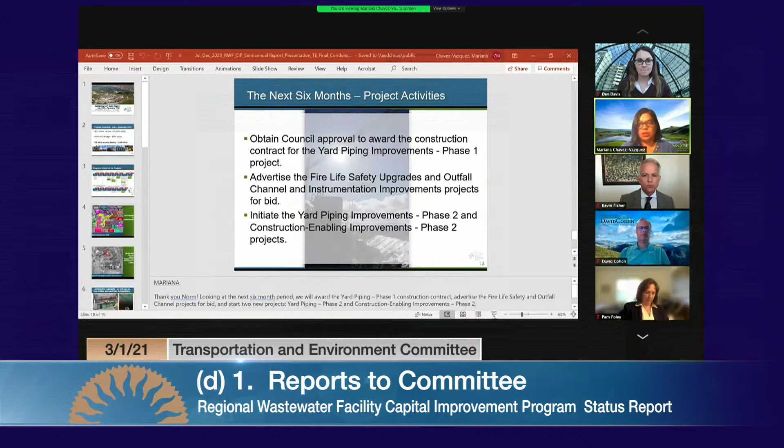Mariana, are you starting us off? Yes, I am. Let me just share my screen. Hopefully we can see it. I have today with us also Norman Mascarenas from our Public Works Department. I'll do the presentation, and at the end both he and I will be available for questions.

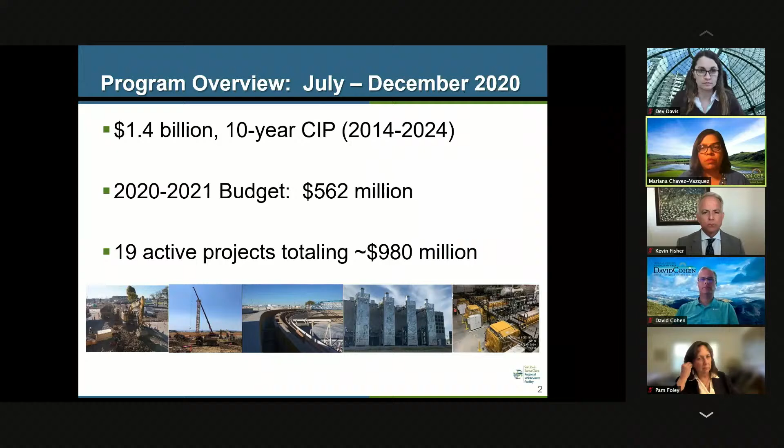This is a semi-annual report for us from July to December 2020. Just an overview, you are familiar with our program: 1.4 billion over 10 years from 2014 to 2024. We are the largest capital program in the city. Our budget for this fiscal year is 562 million, and we currently have 19 active projects from inception to construction, totaling 980 million.

This is just a snapshot of what we are doing, a diagram of how we deliver projects. We have right now two different ways to deliver our design-bid-build projects, and then we have three progressive design-build projects. We are in different stages. We're going to focus more on some of the construction projects to show some of the progress we have had in the last year.

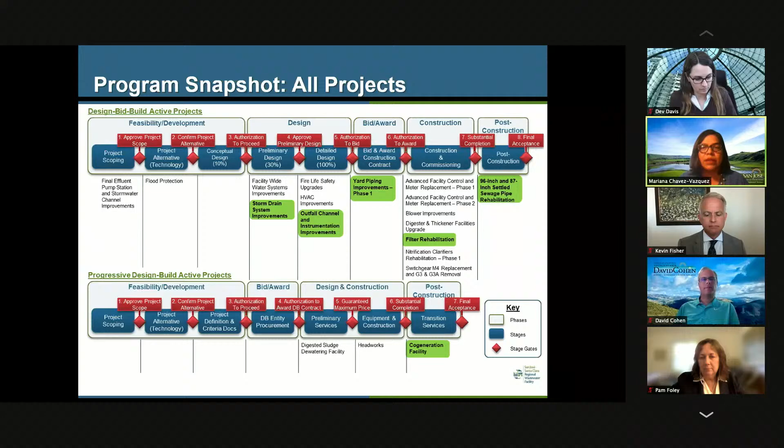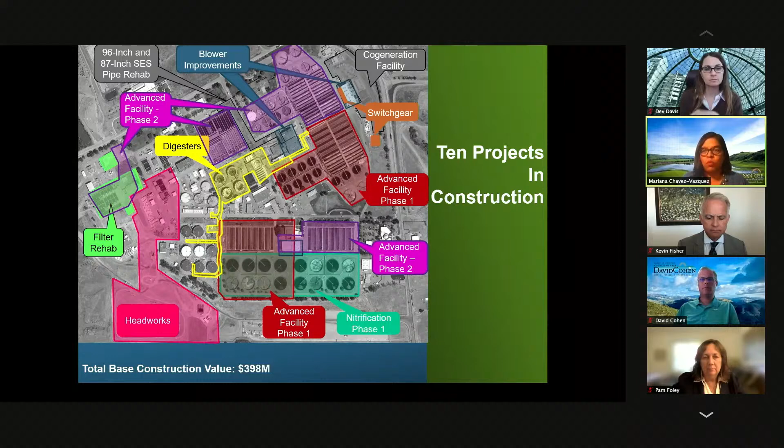Just to give you a sense of how much construction we have going on, we currently have 10 projects. This is just an aerial picture of the RWF showing the extent of construction in all these different projects. Here are the names, and the total base construction value is 398 million. Some of these projects are just at the beginning of construction, some more advanced, and we'll talk a little about some of them in the next slides.

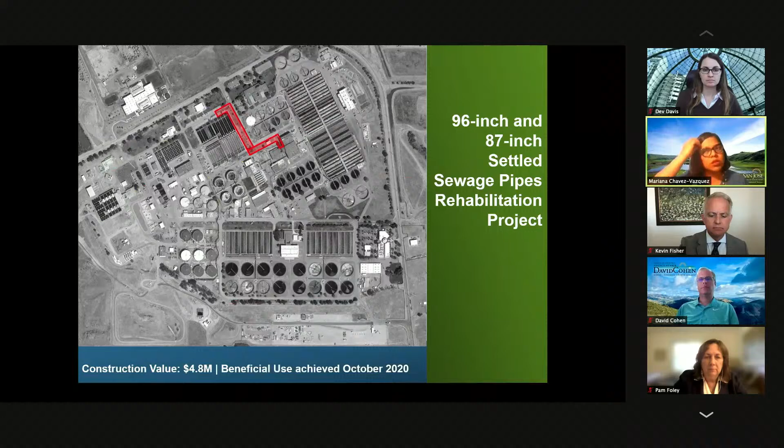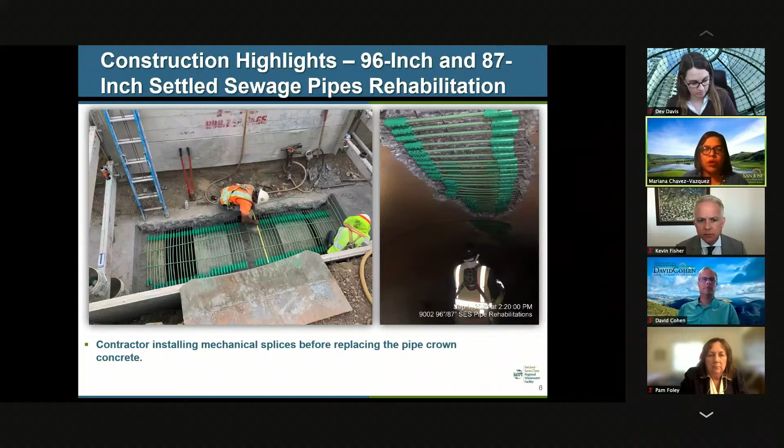One small project I wanted to highlight is only $5 million, but it's one of our big piping replacement projects. This yard piping project is the second of a number of projects that will be completed in the next few years. These projects can only be done during the summer, during dry weather, because they involve really large pipes that we are rehabbing. Here are a couple of pictures to give you a sense - the pipes were corroded because of the nature of sewage. You can see one of the inspectors walking inside the pipe to show you the size. This smaller project is just completed; we have another phase going.

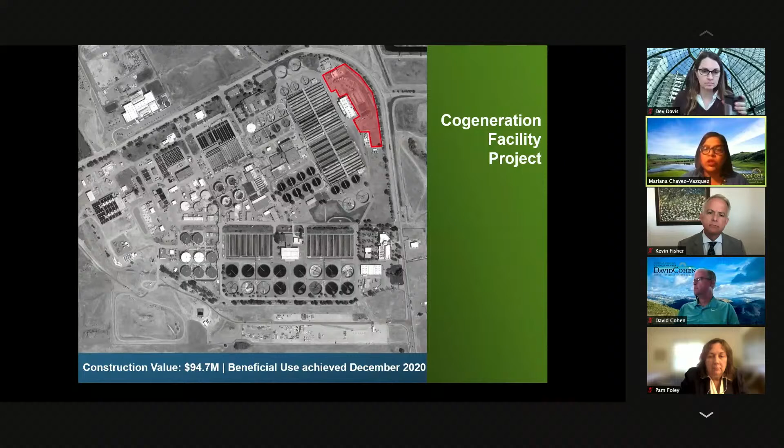We have much larger projects we want to show you. One that some of you were at the ribbon cutting for is the Cogeneration facility project. This project was almost 95 million, and we just completed beneficial use in December 2020.

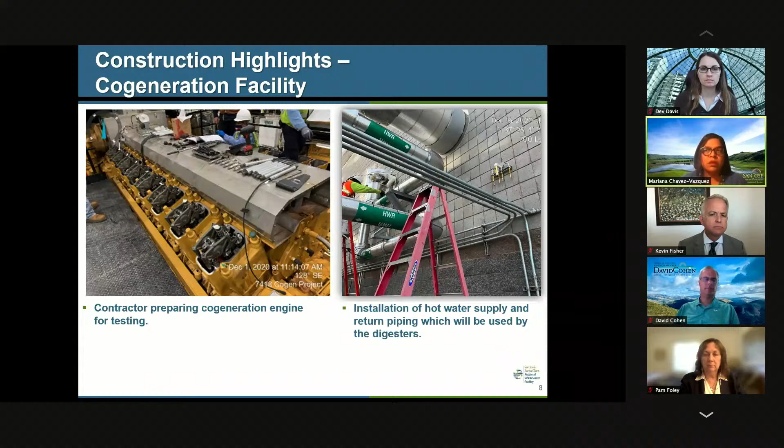A couple of pictures show the contractor still finishing the cogen engines and some process mechanical work. This project was completed during COVID, so we had a bit of remote startup and some interesting things happened, but we want to show a quick video of the finished product. You can see the new cogeneration building on the left, and also the different auxiliary equipment for gas cleaning. The project was completed in almost 2 years of construction, and it's part of our reliability and resilience projects because we are now closer to being self-sufficient in terms of energy - we're generating almost half of the energy the facility needs with this project.

Let me go to the next slide. The digester and thickener facility upgrade project - this is a project we have been working on for a few years now in construction.

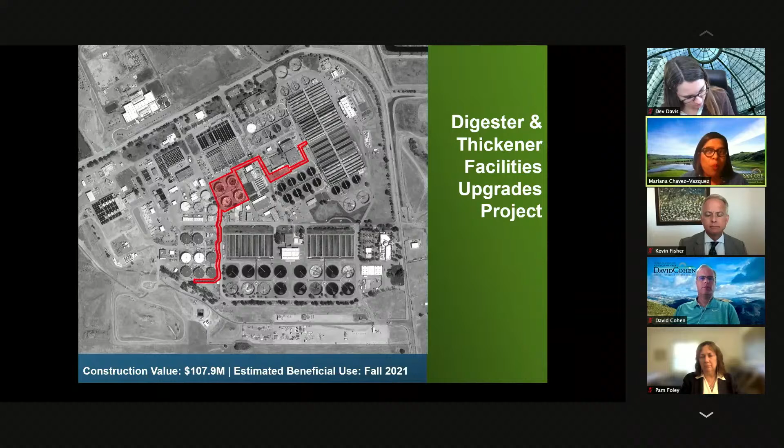107 million construction value, that's just the base value. And we are hoping to have this done by the fall this year.

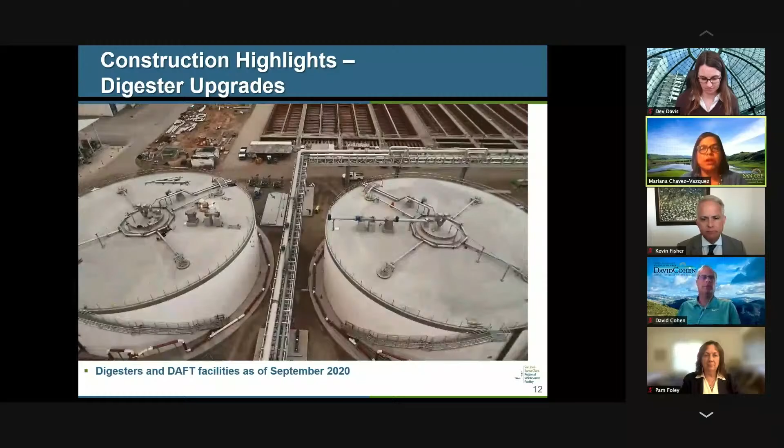Just a few pictures to show you some of the progress in the work, but I think it's more impressive to see the drone video. You can see here the 4 digesters that have been completed, full structural seismic rehab, all the gas lines going in what almost looked like a monorail above ground.

We took all the flammable piping out of the tunnels. The compressor building is where gas gets compressed to be sent to our cogen facility. And what you see in the back is also part of our first phase of projects for odor control.

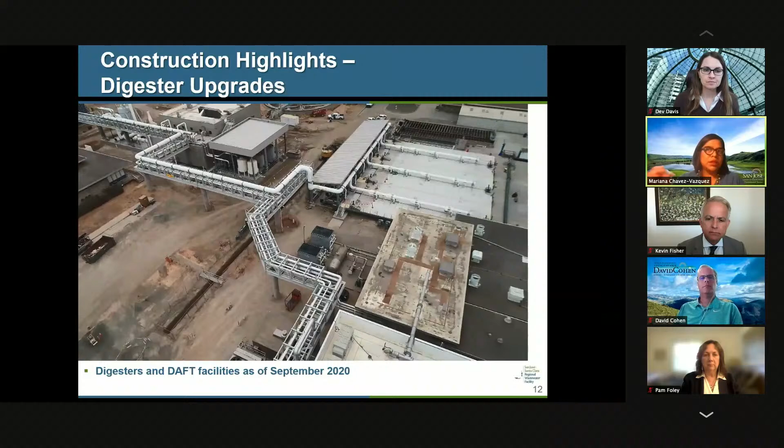You can see those are our DAF tanks that we are rehabbing, and what you see is aluminum covers with 3 lines of ductwork. That's basically all the odor control system. All air from there is going to be collected, scrubbed, and cleaned before releasing.

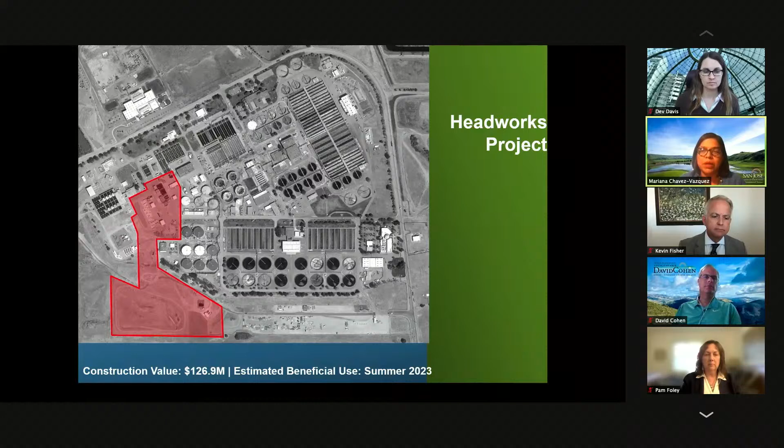Let me just go to the next slide. The Headworks project is our second progressive design build job, really impressive, very large in size. Jacobs is again our partner for design build on this one.

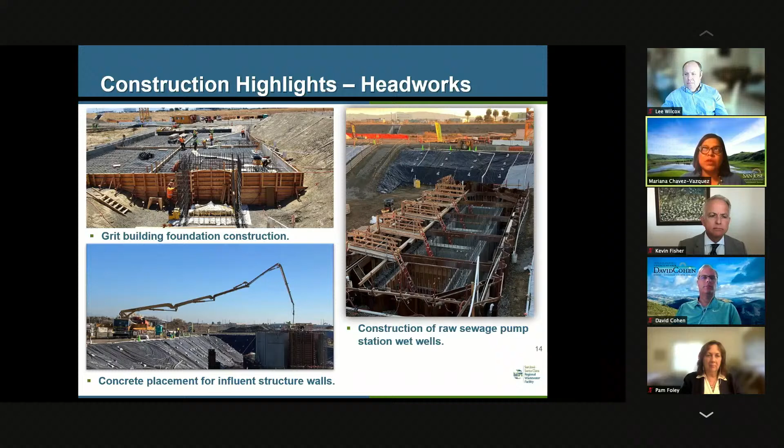I'm just showing you some of the new construction that is happening. This will also replace the original Headworks facility that we have from the 50s, brand new and state of the art.

Again, the drones are a good way to show the extent. You can see the cranes and the really deep excavations being done right now, and some of the newest structures being constructed. We are making good progress, and this is actually one of the more complex constructions we have right now.

We are happy to answer more questions. And then just a few other projects: Nitrification Clarifier Rehab Phase 1, one of our regular rehabilitation projects.

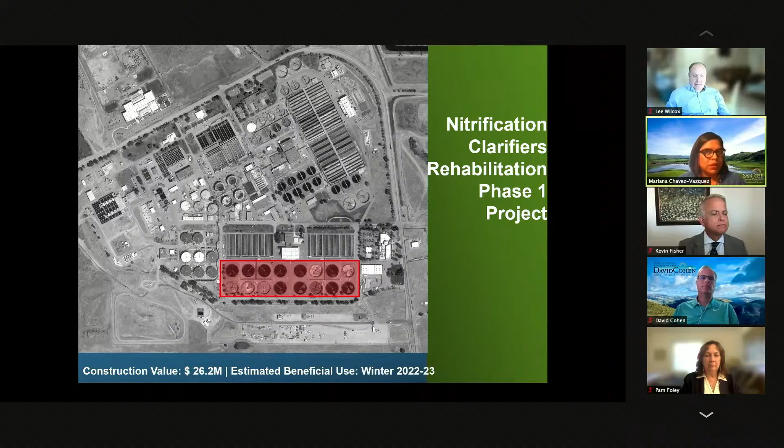We're basically rehabbing equipment and mechanisms in the tanks and doing some modifications. This is phase 1; there will be a second phase with the second set of clarifiers later on.

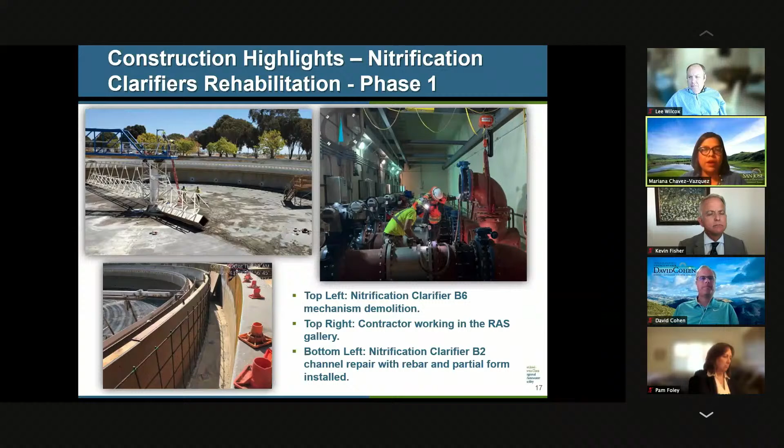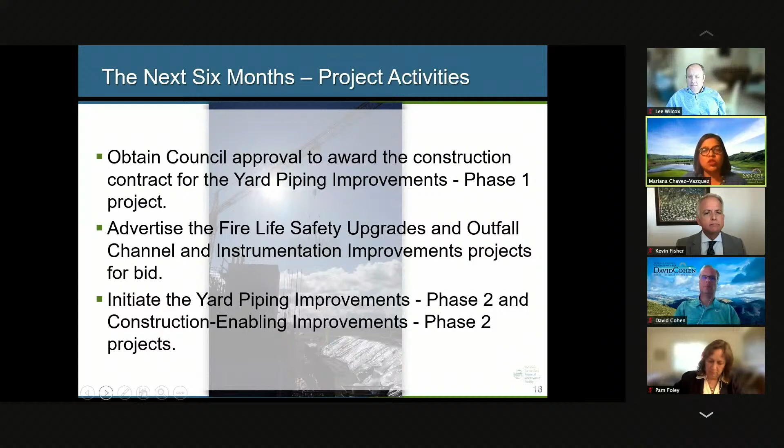Just a quick summary of what's going to happen in the next 6 months: we're going to come back to council. There are a couple of construction projects I want to start, the Yard Piping Improvements. We're going to advertise our fire life safety and Outfall Channel, and also initiate some other improvements on the Yard Piping shown at the beginning.

In terms of programmatic activities, we are going to be seeking new general engineering master agreements. We're almost at the end of our current master agreement, so this is just part of our ongoing professional services.

This goes through December. Actually, the virtual vendor open house happened in February, and that's something we do every year to give the community of consultants and contractors a sense of what is happening, make them aware of opportunities, and highlight some of the things we're doing in the program.

And then we're just going to continue with recruitment activities. We still have quite a bit of vacancies, especially in the engineering part, that we're trying to fill, and hopefully that will be more successful this year.

And that's the end of the presentation. I tried to keep it to less than 10 minutes. So if you guys have questions, we're happy to take any questions you may have.

Good afternoon, Chair and Council members, committee members. Let me share my screen here and jump right in. Get myself on the right screen. We're going to go through the annual bike plan, now the Better Bike Plan 2025 report, and the annual trails update. Let me just get us in the right place. There we go, from the beginning. All right, there we go.

We're going to go through implementation status on our bikeways and trails, give you a couple project updates, and talk to you a little bit about funding needs and the strategies we're working on to meet those funding needs, and then tell you about our annual Transportation Development Act projects and funding, which will be going to council later for approval.

We wanted to start off with a bit of a celebration. As we've been telling you for a long time, the last Bike Plan 2020 came to a finish, not only because the year 2020 came and passed, but because we actually accomplished the mileage goal in that plan. It was 400, and as of the end of the year, we had 401. By the end of the pavement year, it looks like it'll be around 406 to 408. So we're really excited, we feel like we've accomplished something huge and lived out the promise of that last plan. I wanted to remind ourselves of how well things have actually been going.

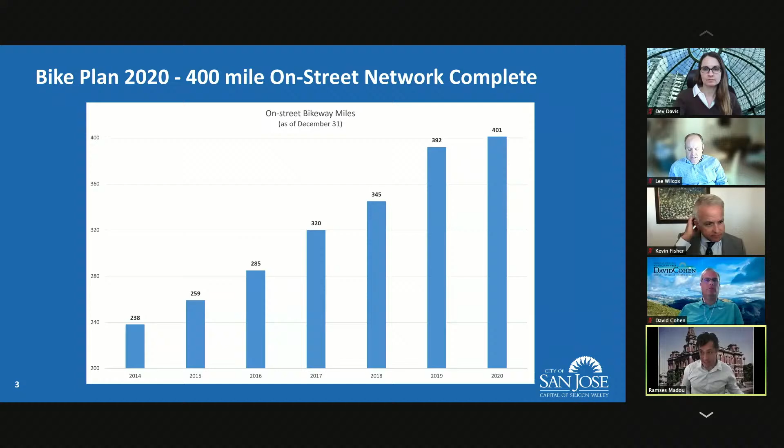With that, we brought in Better Bike Plan 2025, which was adopted in October. The vision there was to bring our current bike system up to a level of comfort and safety for everybody, of all ages, abilities and backgrounds, really expanding the use of our system to a lot more people. In this new plan, we're looking at 557 miles of bikeway, including a lot of upgrades as well as new mileage. With that, I'm going to pass it over to Liz to take on the trail network.

Thank you, Ramses. Hi everyone, I'm Liz Sewell, I'm the trail manager for the city of San Jose. I'm going to talk to you a little bit about our trail network updates over the past year. First, I wanted to show you this overall overview - on the left-hand side you can see the Bay Area Trails Collaborative, a group of trail organizations and agencies in the Bay Area who have put together a comprehensive network of over 2,000 miles of trail, which San Jose is part of. You can see San Jose's trail network expanded on the right side.

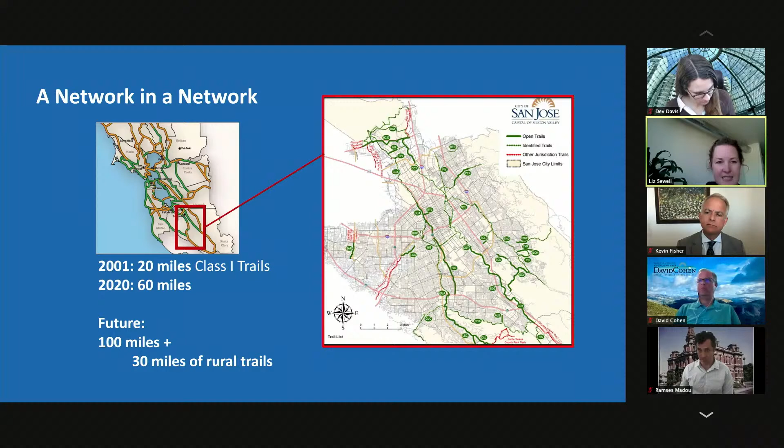These aren't all of the trails that are active. There are many other active trails. These are the trails that will be developed to construction within the next few years. The reason we only wanted to show a few years out is because after a few years, timelines for trail development can get fuzzy, just because of major and unpredictable events like floods and other natural disasters, social issues, and things that seem as simple as executive changes at railroads can really throw a wrench into trail development plans. But I wanted to show that there are many other trail projects we're working on. We have a total of about 30 trail segments that we're working on.

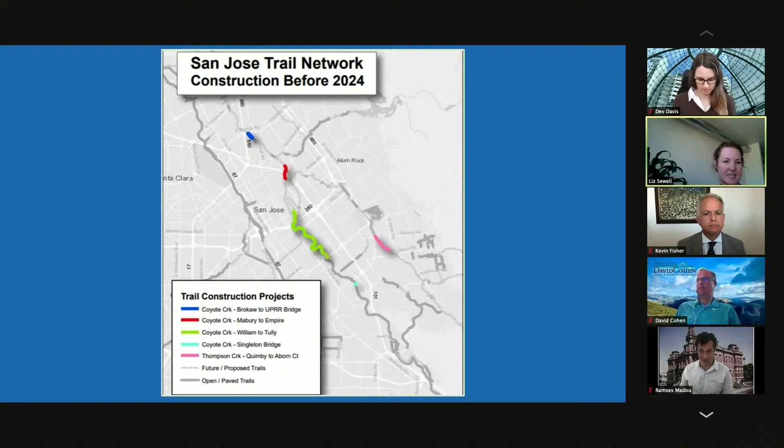So that is all I have for now. I'm going to hand it back over to Ramses.

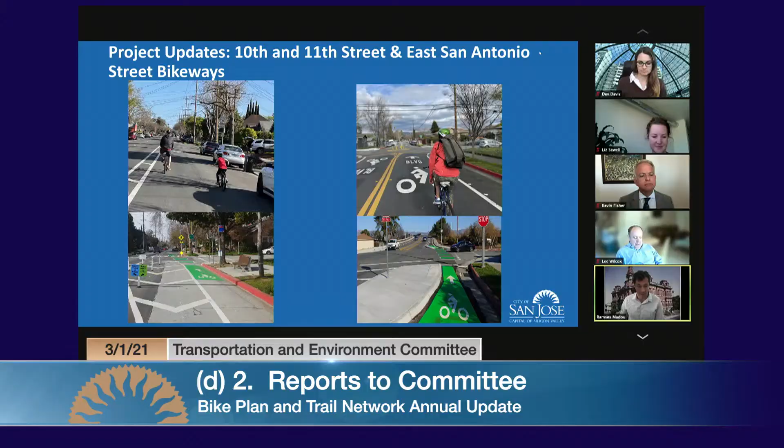Thanks, Liz. There's some exciting work going on the streets as well in the bike network. Here are two of the projects that are in the midst of getting completed or very close to getting completed. We have the 10th and 11th project. If you've been downtown lately, this goes the entire length of 10th and 11th. We are building out some innovative designs there that have helped us solve the very hard problem of creating protected bikeways along roads with a lot of driveways.

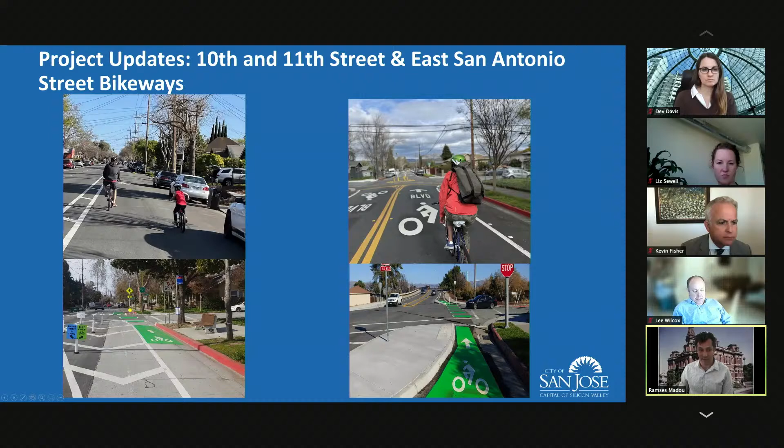We're creating an innovative frontage lane there, and that's actually the cement barriers that will fill in here on the top left photo. You have this kind of barred striping here that'll be filled in with curb, starting by the construction project, which will start by the end of the month.

And then on the right side here, we have East San Antonio. This is a very important east-west connection in the bike network. It is one of the few places where we can really make sure there's strong support for bicyclists going east-west. One of the clear directives we got from council when we adopted the bike plan.

You can see here both the protected treatments that we are doing at some intersections, some roundabouts, to protect that. And also interestingly with this project, right at this corner here in the bottom right, there's some local designed art stamped into the sidewalks that we were able to work with some local artists on.

All right, so getting into the funding conversation, kind of keeping this top of mind for folks. The total on-street network costs for the bike plan, you can see the ranges here, are upwards of 260 million. The focus areas, which were North San Jose, downtown, East San Jose, and some other areas of the city, this is kind of our 5-year plan. Of those focus areas, get us out to about 121 to 162 million.

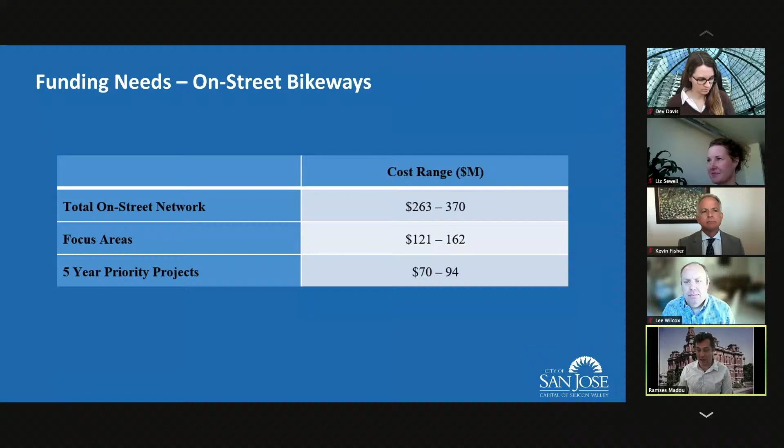And then we have our 5-year priority projects. These are our really big bang for the buck, most effective projects. And there we're looking at 70 to 94 million.

We're looking at a whole host of different strategies, mostly grant strategies to get this done, to see what we can do. We have some of them in hand, like the Transportation Development Act, but we're starting a program of developing grant applications early and working with VTA, MTC, and other funding bodies to really look at this. We're even looking at a philanthropy-based attempt, kind of like how the Bloomberg folks came in with the climate challenge. We're looking to see if there's other philanthropic sources of funds for this as well.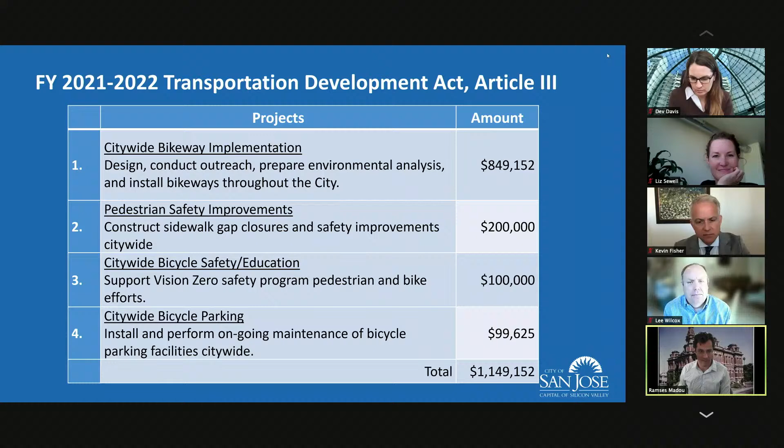Yeah, and with that, we'll leave it open for questions.

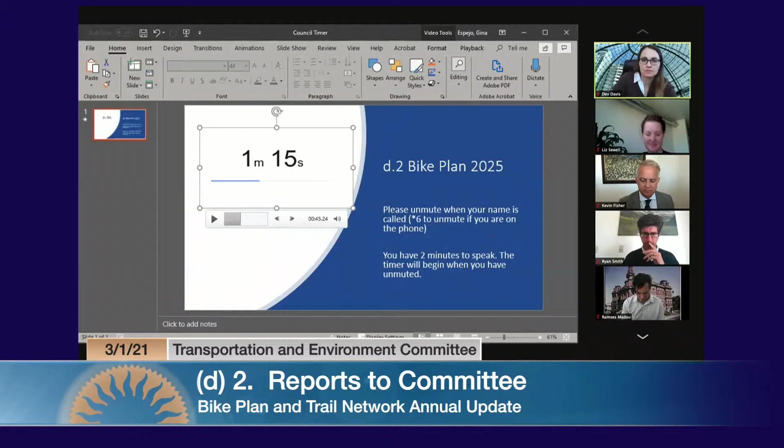Thank you. And turning back to the council, Councilmember Peralez. Yeah, thank you, Chair, and thank you to the staff on this presentation. Certainly, as we've begun a lot of our efforts in building out our bike lanes, that work has started in the downtown core and really branched out. We appreciate seeing all that investment and being able to actually utilize it as a resident of downtown on a daily basis. I had a couple questions.

I know that unfortunately Peter Bennett recently left DOT, and he was very responsive to the concerns and complaints that came in around bike lanes, always working with stakeholders to educate them and find solutions to mitigate some of the impacts. How is DOT going to, or have we already, filled that role? And more importantly, I just want to make sure we can continue that level of responsiveness that I think Peter was really good at.

Yeah, thanks. Peter was a huge asset to us, and we're sad he left. Friday was actually his last day, and we've been triaging his workload. So we are continuing - we're passing it to Ryan Smith, who was on the call. There he is, still here - he's taking on a lot of the workload and making sure we continue that level of project engagement and public outreach in particular, making sure we continue to communicate all the changes that are coming and respond to the comments we're getting.

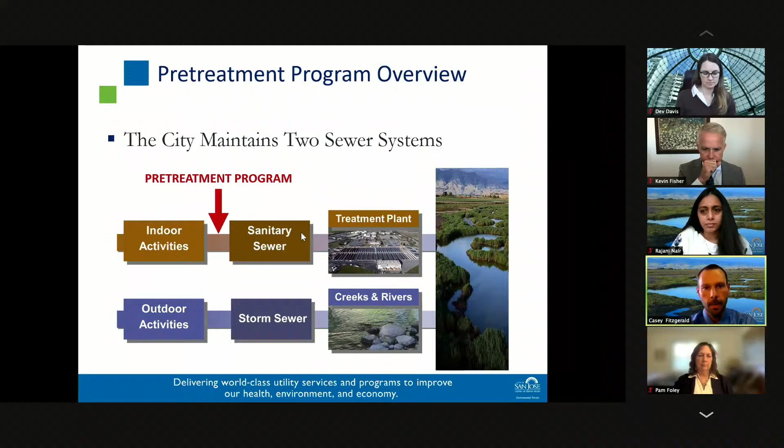So why is pretreatment important? Industrial pretreatment, first and foremost, is a direct requirement under the Clean Water Act. Industrial users are required to treat their waste at their own expense prior to discharge to ensure suitability with downstream systems. Pretreatment is important for the protection of human health, the environment, and infrastructure. Our regional wastewater facility is designed to treat conventional pollutants only, including things like pH, solid materials, and floating or sinking materials—not necessarily the kinds of toxic pollutants from industrial discharges, such as metals, solvents, cyanides, and proprietary chemistries. This is where our program comes in to regulate these wastes and protect our regional wastewater facility.

I've included some pictures of what unmitigated industrial pollution looks like in the sanitary sewer system. In the upper right, that photo is from Louisville, Kentucky. This is a low part in the sewer main where an industrial discharger had been discharging hexane gas over a period of time. Once conditions were right and a vehicle was driving overhead, a spark created an explosion in the sewer system, resulting in the loss of life, and as you can see, some pretty heavy infrastructure damage.

The picture on the lower right, most of you have likely seen—this is the Cuyahoga River in Ohio. In the 1950s and 60s, this river caught fire nearly a dozen times due to uncontrolled industrial pollution flowing directly into it. I'll note that this picture of the Cuyahoga River on fire is really one of the things that helped usher in the Clean Water Act in 1972, sweeping regulations that really focused on cleaning up the nation's waterways.

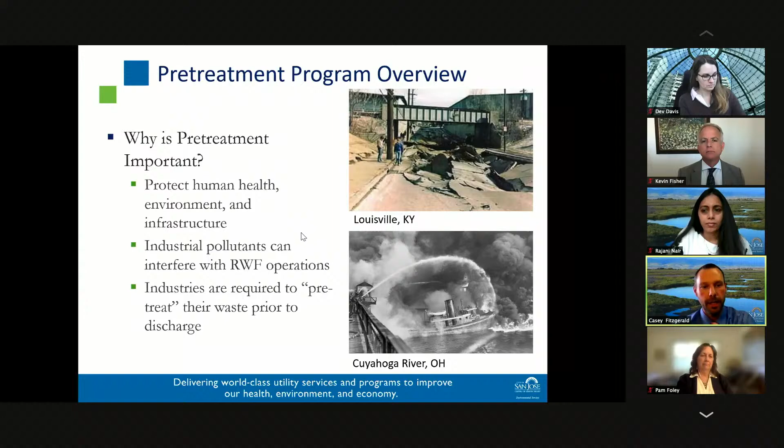As a regulatory authority, the pretreatment program works under a defined set of regulations at the federal, state, and local level. At the federal level, EPA has promulgated nationwide standards based on best available technologies. It also includes general and specific prohibitions in addition to industry-specific regulations.

At the state level, the state is responsible for administering the NPDES, or the National Pollutant Discharge Elimination System. This is a permitting program to allow discharges to the waters of the state. In the RWF, or the Regional Wastewater Facilities Permit, there's a direct requirement to implement a pretreatment program, based on the size of the facility, the volume of its flows, and also the industrial component flowing into it.

At a local level, this is when we really start to dial into environmental factors. Local regulations are environmentally based. This includes the development of local discharge limits for industrial dischargers, focused on protecting our receiving waters, which is the south end of the San Francisco Bay. It also looks at the regional wastewater facility's ability to remove certain types of pollutants.

All this helps to shape the industrial component of what industrial users can discharge to our regional wastewater facility. The final point on local regulations is that we are required to develop them through our sewer use ordinance, which we'll discuss a little bit later on.

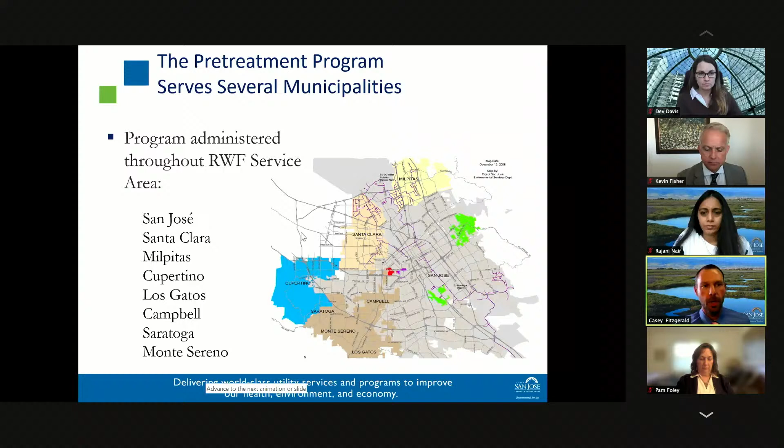I want to note that this program, the pretreatment program, is funded through the Treatment Plant Operating Fund, Fund 513. I provided here a map of our service areas showing the different areas we work in with the various other municipalities and sanitary agencies highlighted.

A little bit about the history of the program: it started as what was called the Industrial Waste Program in the 1950s when our regional wastewater facility was formed. The primary focus at that time was on cannery waste and the production of weekly cannery reports. Flow was a big issue, as was biological pollution - solids and other materials that take a lot to break down at our regional wastewater facility. At that point, the program worked hard and was in close communication with all the canneries in the area to understand what was in production and what kind of flows to expect.

In 1972, everything changed with the promulgation of the Clean Water Act. This really paved the way for what would become the modern pretreatment regulations. In the 1980s, the city of San Jose formalized its pretreatment program, gaining state approval to implement it. We've continuously implemented this program since, and it has also adapted to local industrial trends over time.

We saw this valley start with the canneries and then move into defense contractors, followed by hard disk drives, printed circuit boards, and semiconductor fabrication. More recently, we've seen trends in solar research and development and pharmaceutical manufacturing. As we move into the future, this program will continue to adapt. As we start looking at wastewater as a resource, a possible source of drinking water, we will continue to protect those sources for our citizens.

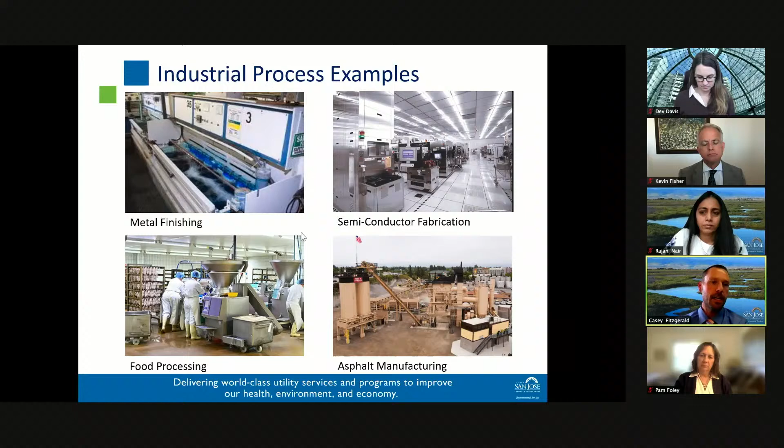Also want to note that the federal regulations themselves have specific discharge limits built on specific industry types. There's around 50 industrial classes that the federal government looks at nationwide. These range and vary from things like airplane de-icing to rubber manufacturing, metal forming and die casting, pharmaceutical compounding, and battery manufacturing. It's a pretty sizable list.

The pretreatment program relies on several tools to enforce environmental regulations. This includes our permitting program, where all dischargers are required to obtain a permit prior to discharge to our system. We have our inspection and monitoring programs, where we inspect and monitor each industry two to four times per year. We operate a full enforcement program that ensures consistency and escalation through a state-approved enforcement response plan. We also have a reporting program where we require industries, at their own expense, to do their own monitoring and analysis and report those to us.

Finally, I want to mention that we also rely heavily on partnerships. We work in a pretty defined lane of regulation; however, we do have inspectors on the ground at facilities at any given time. If we observe possible violations of ordinances outside of our jurisdiction, we have a full referral process for that. So collectively, all of us regulatory agencies try to work together—if we notice something that may be of interest to another agency, we'll forward that on.

Shifting gears, wanted to touch base and talk a little bit about the COVID-19 pandemic. Obviously, as a regulatory agency that relies on inspectors being in the field and at the businesses that we regulate, certainly we had to make some changes there.